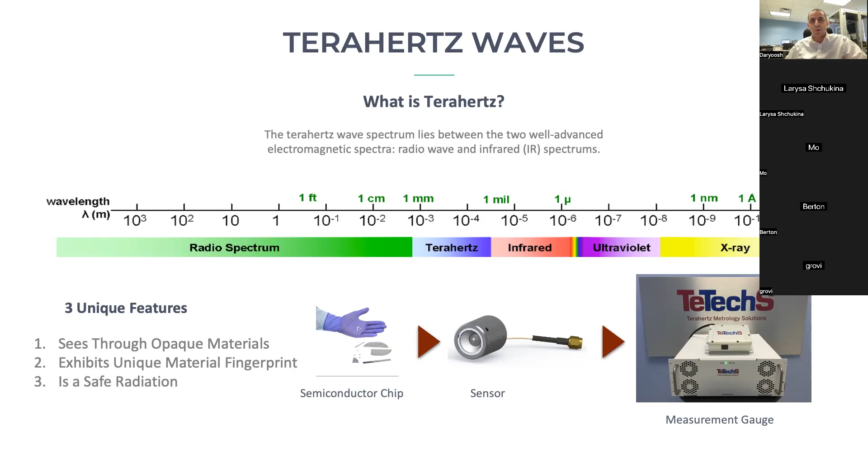No shielding from the exposure to the terahertz light is required. So there are several ways to basically utilize terahertz lights and use it for the type of applications that it allows people to do.

When it comes to the metrology and precision measurement application, the terahertz time domain measurement is proven to be the best way to utilize the terahertz and its uniqueness for precision measurement.

So in a typical traditional system, you can build one of these systems on an optical bench. The picture on the top left shows one system I had the chance to build at the University of Waterloo back in 2006, 2007 timeframe. So once you put that system together, you have a transmitter and a receiver which generates and detects the terahertz light.

You end up being able to generate an extremely short pulse, electromagnetic pulse, and detect it and record it. If you look at the frequency content in that system, in that measurement pulse, it has a few terahertz bandwidths in it. So that kind of short pulse in such a system can be used to do useful things, particularly when it comes into the precision measurement and metrology application.

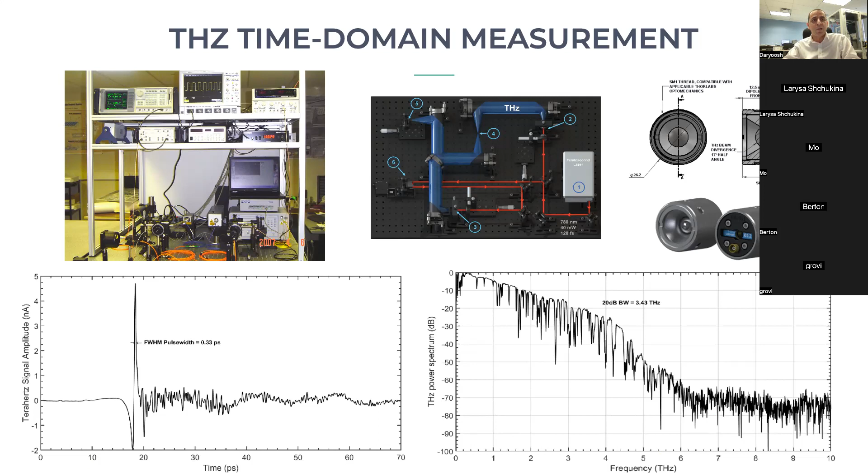So terahertz time of flight becomes the technique to do metrology applications, particularly when it comes to some sort of a thickness measurement application. In its nature, it's very similar to the concept as the ultrasonic measurement, which has been around for a much longer time, and it's more mature technology.

But in this case, we don't need a couplant medium, which is the case required in an ultrasonic measurement, because ultrasonic is a mechanical wave. So the sample under test, for example, has to be immersed into, let's say, a water bath.

With that comes a lot of challenges. Even the temperature of the water changes affects the accuracy of the measurement. Some bubble creation in that bath could affect the measurement. And in a lot of cases, it's not even possible or convenient to put the sample in a couplant medium.

Like a water bath. But in principle, that ultrasonic pulse measurement has been around, and it uses a time-of-flight technique to do the measurement. When you use the terahertz pulse time domain system, you overcome a lot of limitations there. And in fact, it doesn't need any sort of ongoing calibration.

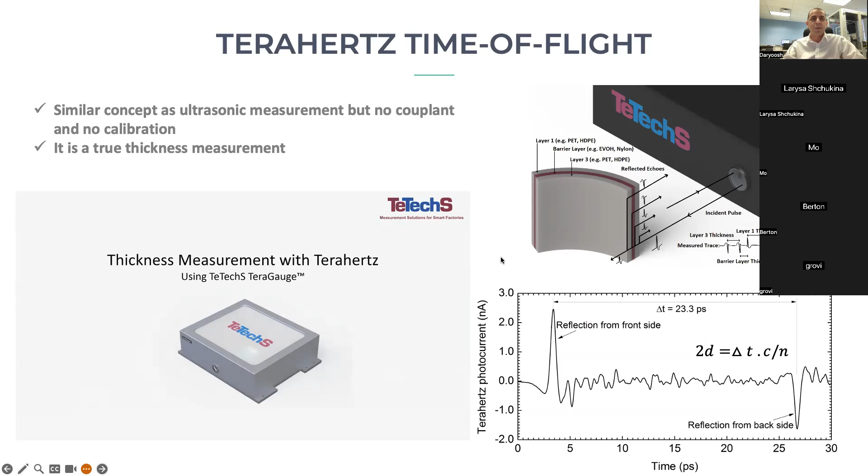So here is a video basically showing the principle of that time-of-flight measurement, one of our earlier measurement systems, just as a concept. You see the sample, which in this case is an opaque bottle, gets exposed to the terahertz light, and you get the echo from the front side of the bottle, the spot you're measuring, and the other side. Then the system automatically takes the timing, and in this case also plots the thickness value at that spot. So that, in simple form, shows and demonstrates the time-of-flight measurement using a terahertz time domain system.

So in order to install such a system into the factory floor, obviously that optical table system you can build in a lab, but you can't put it on the factory floor. It has to be a very compact and ruggedized solution. Here, a video shows one of our systems built to have a very compact transceiver sensor head, which sends the terahertz light into a sample.

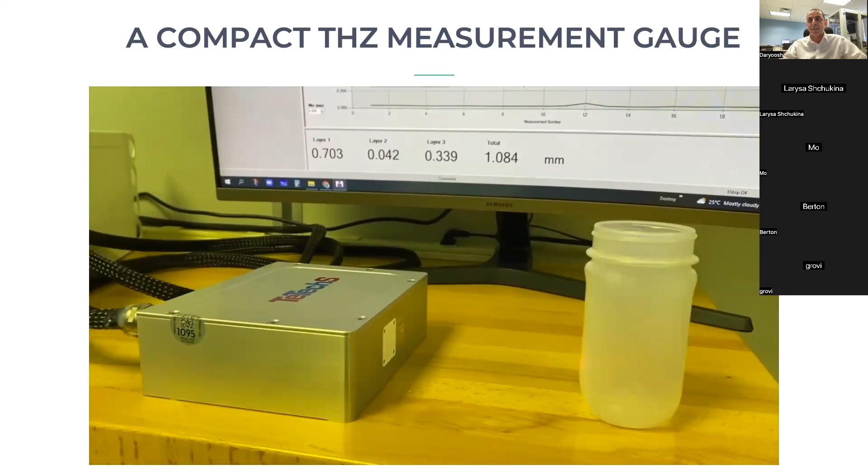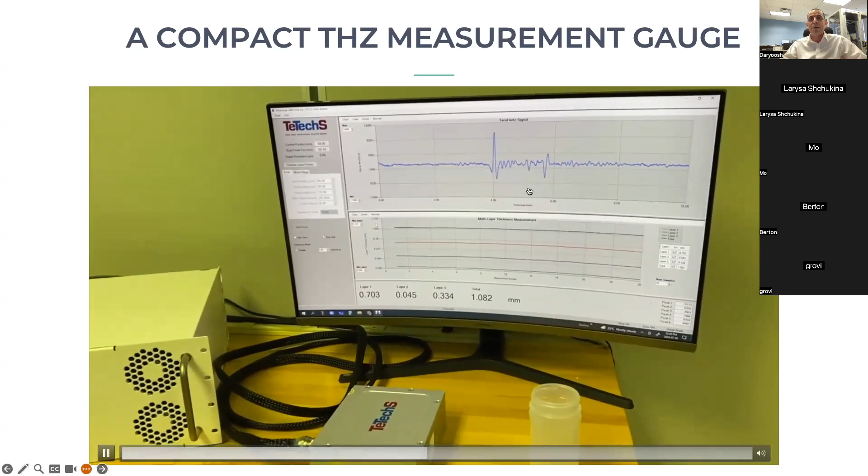Here we have a sample that has a 3-layer structure, an oxygen barrier layer built into the wall to extend the shelf life of whatever product is going to go in it. Maybe it's food packaging used to extend shelf life. So that layer, as well as the wall thickness, gets measured here almost in real time, as you can see.

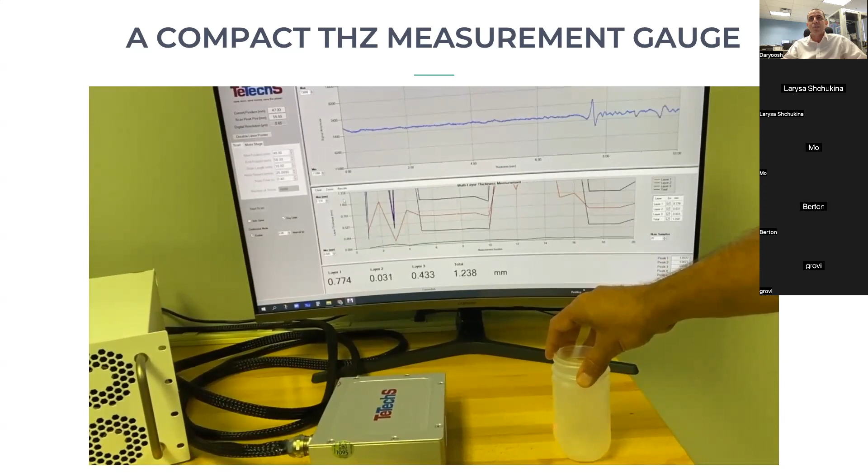And the echoes from each layer, the front surface, the barrier, and the other side, get recorded. So what this video is trying to show is how forgiving the positioning of the sample in front of the sensor can be in this kind of measurement, versus, for example, laser-based or visible light or IR-based measurement techniques, where you have to position the sample with micron precision in front of the sensor to get a reading. Here, it's a lot more forgiving. It can be a few millimeters back and forth, and you still get a reading.

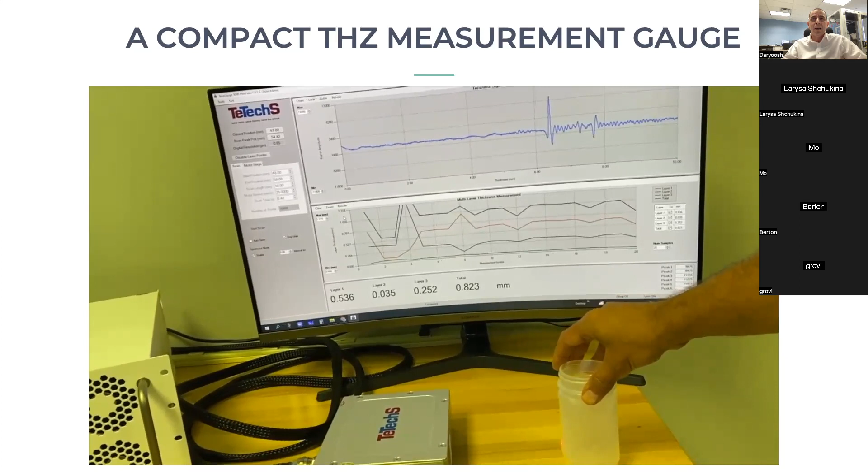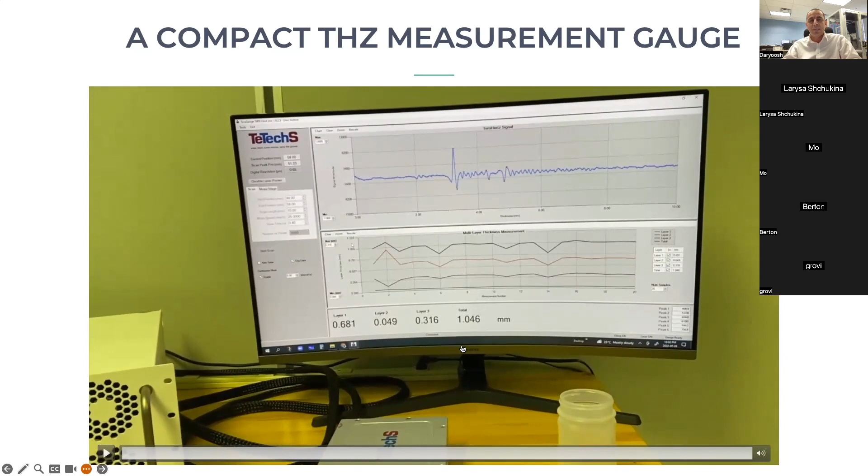So a system like this has the potential to get into a factory floor, and we have actually put a bunch of those in the manufacturing space, and it's running really well.

So let's look at what are the possibilities and the limitations for any technique. It gives you some possibilities and also some limitations. In terms of possibilities, it's a useful technique for multi-layer structures, as long as each of those layers is separated in a way that the echoes coming back are relatively easily distinguishable by the system. We have demonstrated a layer down to 8 microns, and even seen 5 micron thickness resolved with this technique, with a ±1 micron measurement accuracy.

When it comes to coating measurement, for example, a coating on a metallic substrate or on a non-metallic substrate, a lot of other techniques have limitations to measure a coating on a non-metallic surface. With terahertz time of flight measurement, you can easily do that. Coating thickness down to about 40 microns is easily doable. In terms of measurement speed, you can do between 1 to 100 measurements a second with such a system.

In terms of limitations, obviously it's light that cannot penetrate metal, so you cannot measure a metal layer or metal thickness with this technique. It gets extremely strongly absorbed by water and moisture, so that's another limitation of a terahertz-based system. For example, a living cell, which has a lot of water moisture, you might not be able to penetrate through, or parts and samples that are highly moist could be difficult to measure.

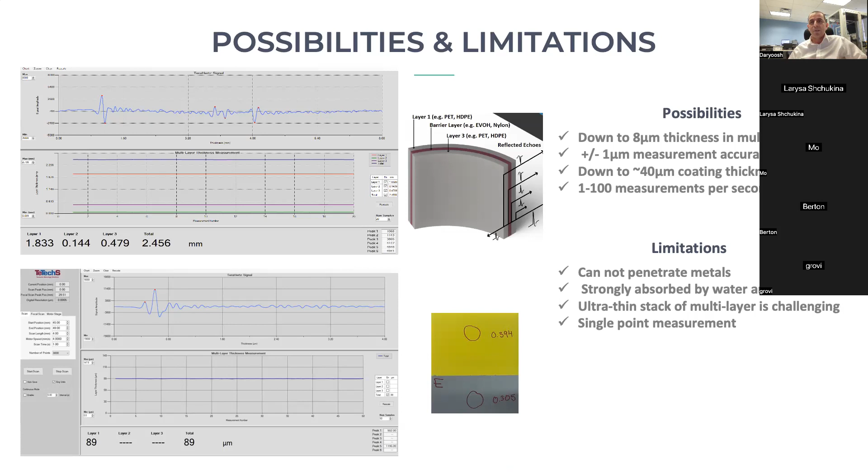When it's an ultra-thin stack of multi-layers stacked on top of each other, very thin layers on top of each other, that also makes it challenging because the echoes start to overlap too much, and peeling them off becomes a challenging task from a signal processing perspective. And it's a single point measurement in its nature - you measure one point at a time with this technique.

So in terms of the applications in the manufacturing industry, there are so many areas the technique can be used. Here is a list of a few of those areas that either have been addressed or can be addressed by a technology like this. For example, in 3D printing, subsurface features can be visible using the terahertz light.

Especially if the 3D part is not a transparent part, which is the case a lot of times, but you want to see if there is a void or an anomaly subsurface that has to be taken care of for the part - this could be a way to look at it.

In the pharmaceutical space, tablet coating - particularly there are tablets that are multi-release, so the coating layers are very important to control the thickness of. This is an area the terahertz measurement can be a useful technique to be applied to.

In the medical space, for a catheter tube, for surgery catheters, there are multi-lumen tubes that are separated by thin walls within one tube, and each is responsible for taking certain liquid in and out of the patient's body. That has to be controlled very precisely so those liquids don't leak into each other and cause issues with the surgery procedure. So that's one area terahertz measurement is a good technique to help with the quality check.

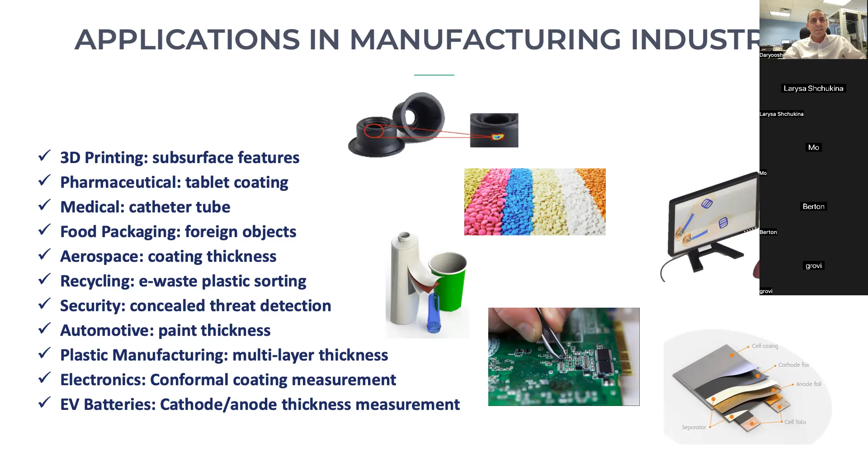And when it comes to EV batteries, for example in production, cathode and anode thickness has to be measured and controlled. Again, terahertz is being looked at as a technique to control quality on that kind of application. And this is just the list - the list can go on and on. There are so many areas one can utilize the uniqueness of this technique to do the quality check.

So let's dive into an example of an application we have been looking at more closely in the industry, which is in plastic packaging, blow molding application, injection molding application. It's a decades-old problem that a lot of blow molded parts, because of their opaque nature, the only way to measure the resin distribution on those products is through some manual micrometer types of measurement.

And if it's a multi-layer, one has to cut it and look under the microscope to get the measurements. That creates a lot of non-reliable data on the resin distribution. It cannot be done too frequently because it's a very labor-intensive task.

There are hours of production that happen with no data, so that could lead into a lot of scrap and waste of material and machine time.

If a flaw gets caught, 4 hours of production has to be separated and not shipped to the customer. Obviously, there's resin overuse because a lot of these machines will overshoot on the resin, especially for oxygen barrier layers to make sure there is enough coverage. That resin overuse can cost a lot of money to the producer.

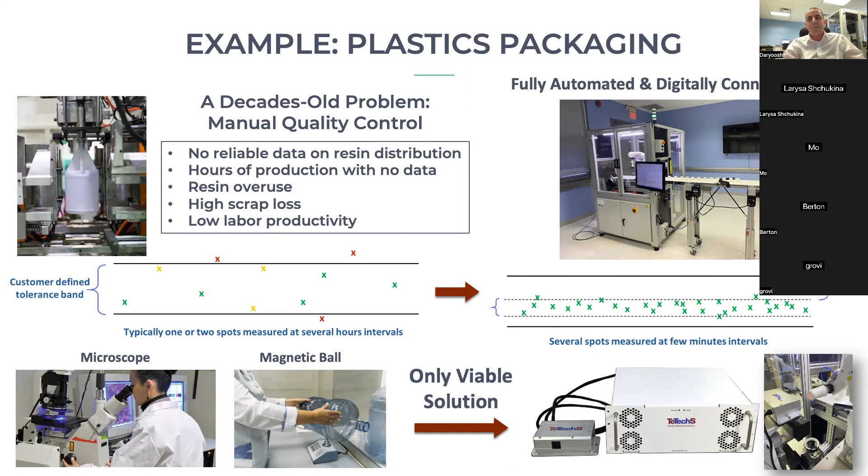So basically, the only viable solution to such a problem is using a terahertz time domain measurement system, and of course it has to be built into an automated solution. Once that is applied, one can take a lot more measurement data and tighten the tolerance range, ending up saving resin, especially the expensive resin, for the production line.

So to build such a solution, obviously just having the sensor is not enough. It has to be an automated, digitized, and connected system. So instrumentation is very key here.

It has to be a complete solution. The end user wants to measure the sample, with the measurement gauge integrated with the mechanical and electronic and user interface, everything in one turnkey system.

It has to be easy to operate. If it's a robotic system, for example, it shouldn't need a person to write a robot program. It has to be so that the non-expert technician should be able to operate the system easily and be trained on it very quickly. It has to be a robust system so that it can withstand a harsh environment.

Typically high temperature, high humidity - these plants are not air conditioned and all that. So it has to be a rugged system from that perspective.

It has to measure relatively fast, at least between 1 to 10 measurements, or better, 100 measurements per second has to be available so that parts can be measured in a fast fashion.

The measurement has to be repeatable and reproducible so that the day-to-day measurement stays consistent and becomes reliable data that people can use to control their production line with it.

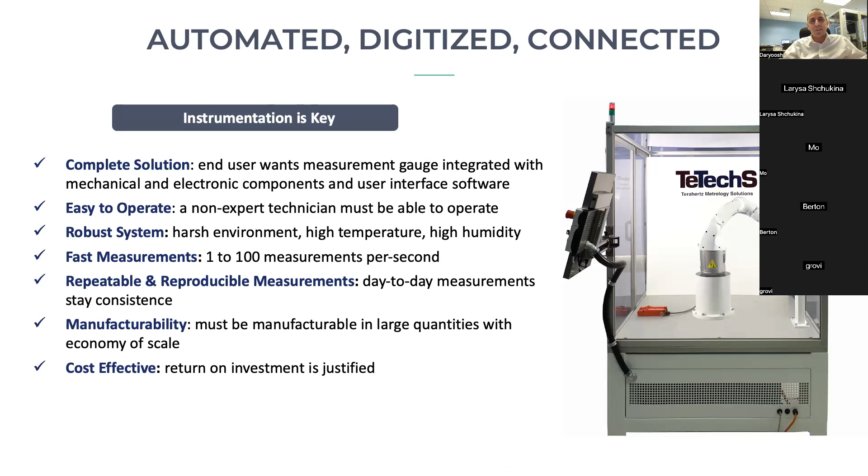Last but not least, it has to justify the investment that people make into such a system to automate their quality control process.

So here I leave you with a video that basically shows one of our systems that is built to take care of a batch-to-batch measurement of a blow molded part and save the data. The video is self-explanatory, so I'll let it run for you.

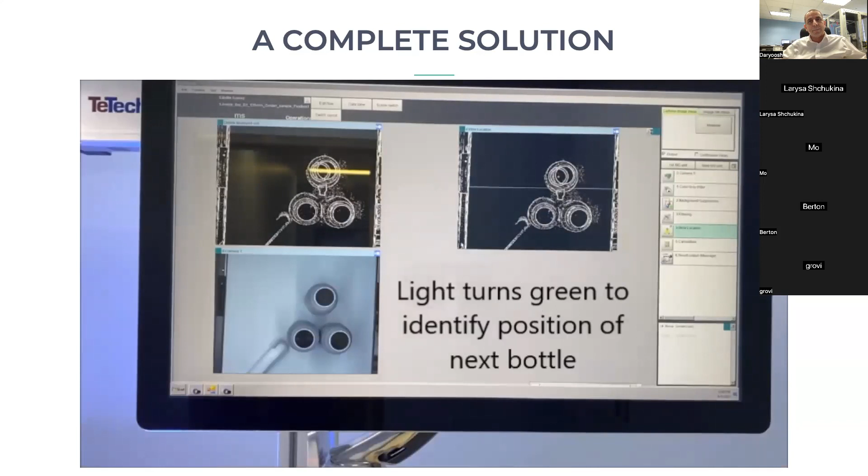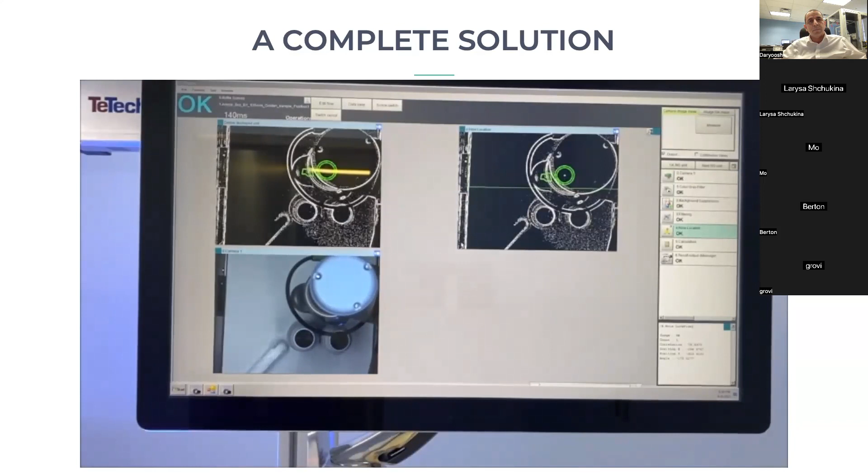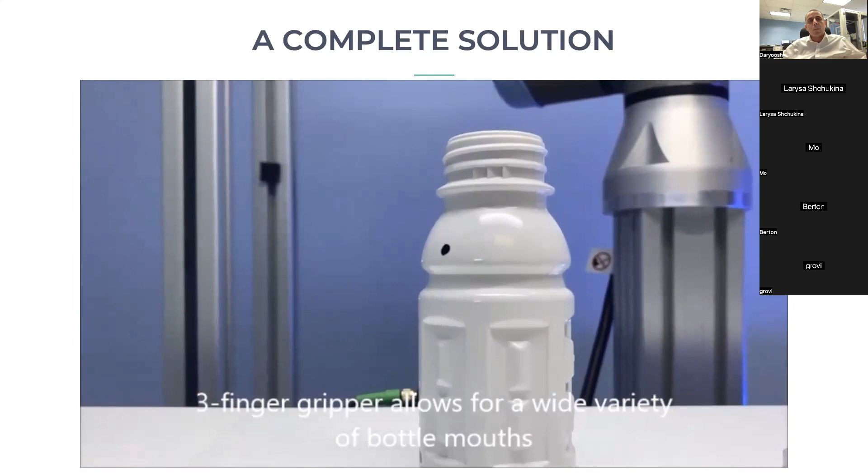As you can see, there is a camera that tells the robot to go and pick up the part automatically. And then the robot goes and picks the sample with a 3-finger gripper, and then presents the sample to the sensor in this case.

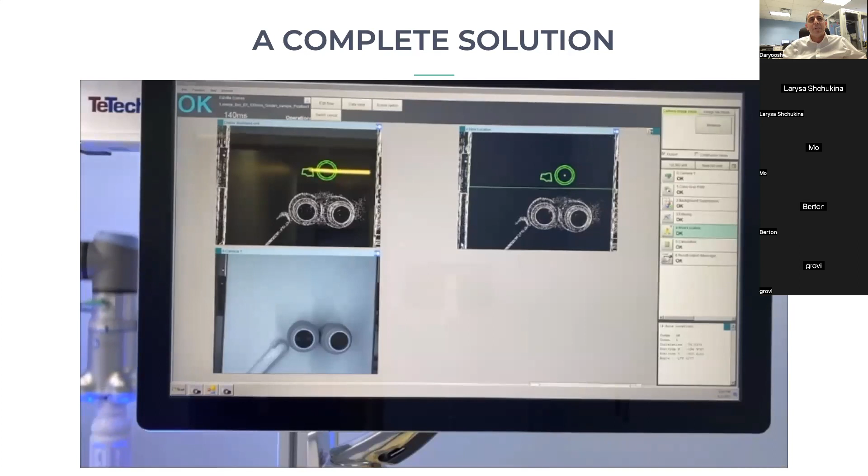First it goes to another camera to read some information, and then, for example, the cavity number, the orientation, and all that can be read and saved.

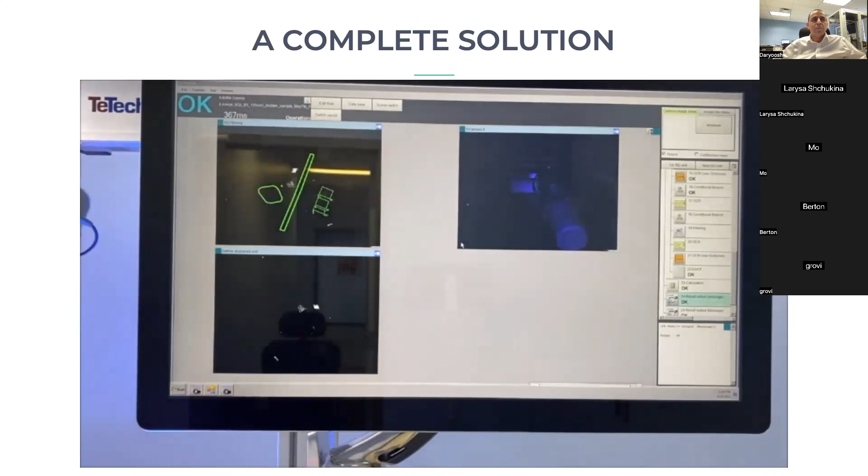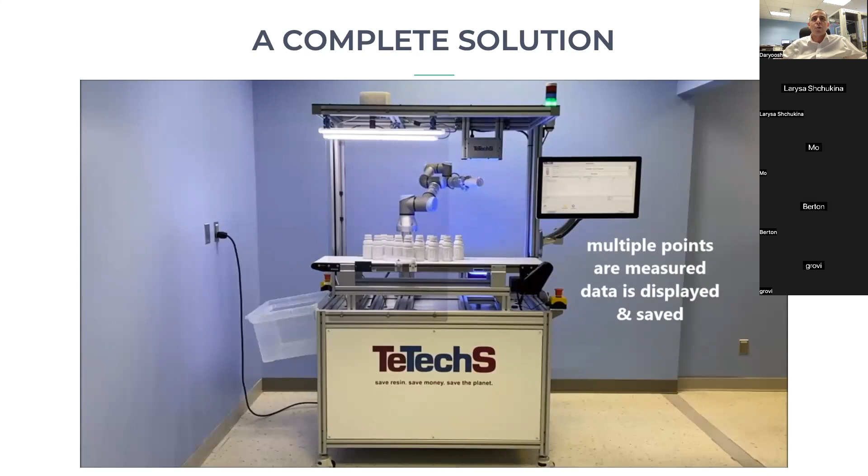And then it moves to the sensor to take a bunch of readings on pre-programmed points in that recipe. So you can have as many samples as you want programmed into the machine, and the operator chooses which one is being measured, and then the machine goes and runs it and measures the sample.

And it keeps going through that cycle till all the samples are done, and at that point it finishes the batch, stops, and saves the data.